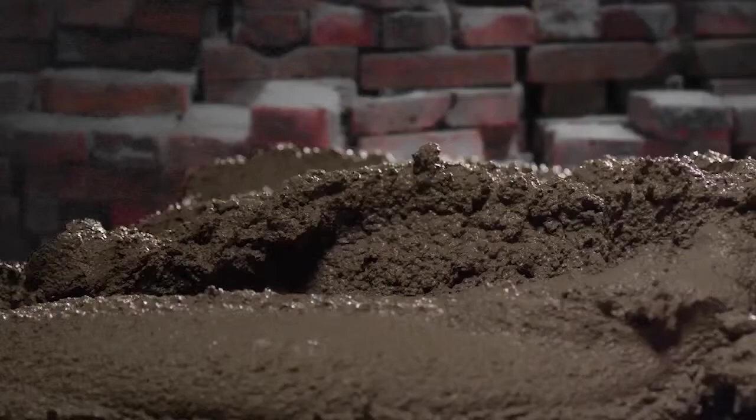Unit 6, Ergonomic Solutions. In previous units, we talked about ergonomics and safety voice. We learned about the risk factors for strains and sprains. Also, we discussed safety responsibility and using good communication skills. Now let's learn about specific masonry ergonomic solutions to reduce these risk factors.

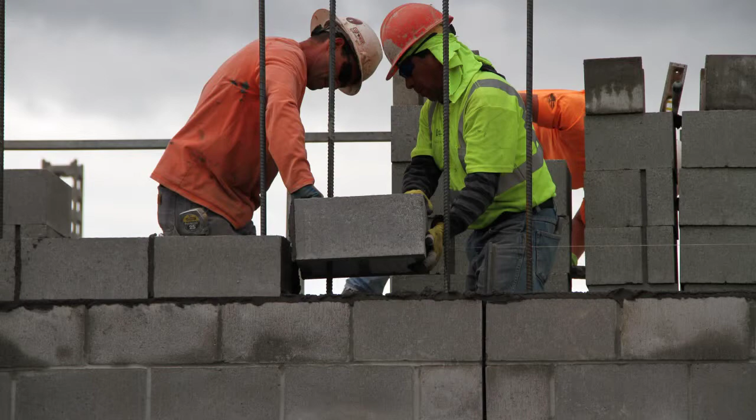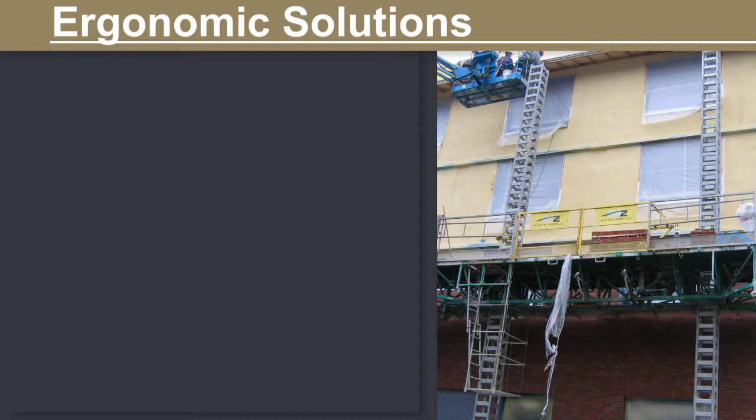Using ergonomic solutions whenever possible reduces your chance of injuries and can help you stay healthy and active for your entire career. Solutions generally fall into three categories: engineering, administrative, and work practice solutions, but they are not all equally effective. There is a hierarchy of solutions. Engineering solutions are the most effective. Administrative solutions are moderately effective, and work practices are important but less effective.

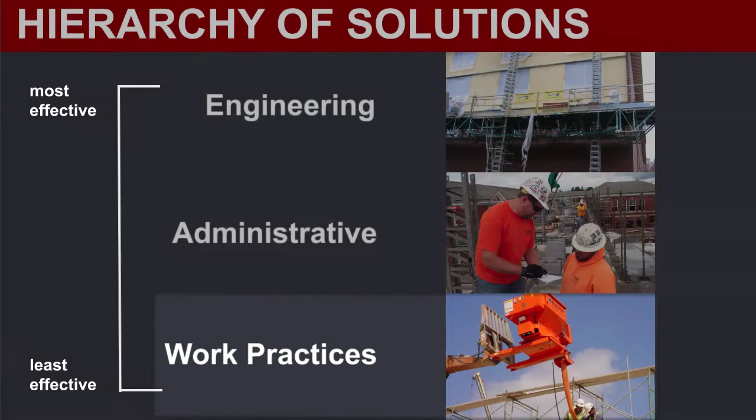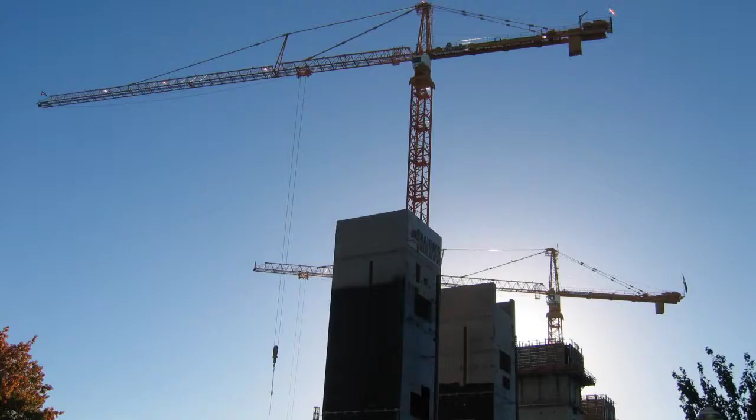What is an engineering solution? This refers to the use of equipment such as lifts, tools such as cordless saws, and work materials such as pre-blended mortar. Engineering solutions are very effective ways of eliminating or minimizing the risk of injury. Some other engineering solutions you may be familiar with are cranes, mortar silos, and using a pumper truck to fill grout.

Look at these pictures. Which do you think is an example of an equipment solution? Record your answer in your workbook. The correct answer is A, mortar mixer, which is material handling equipment. While all of these are examples of engineering solutions, a trowel is a tool, while block is a work material solution.

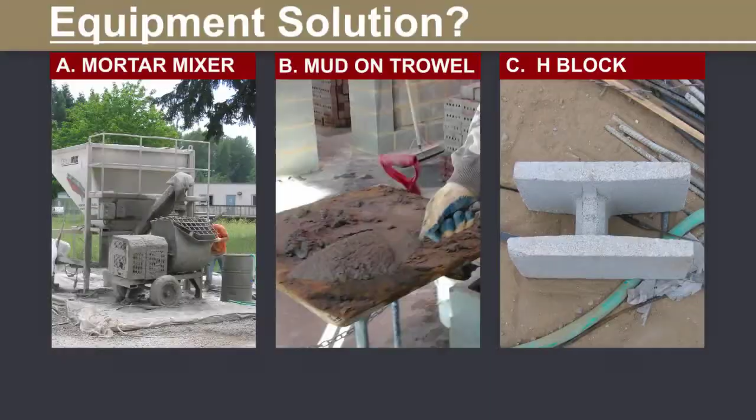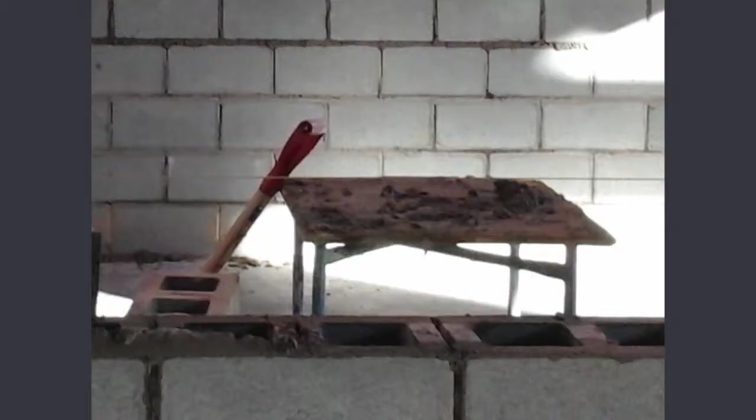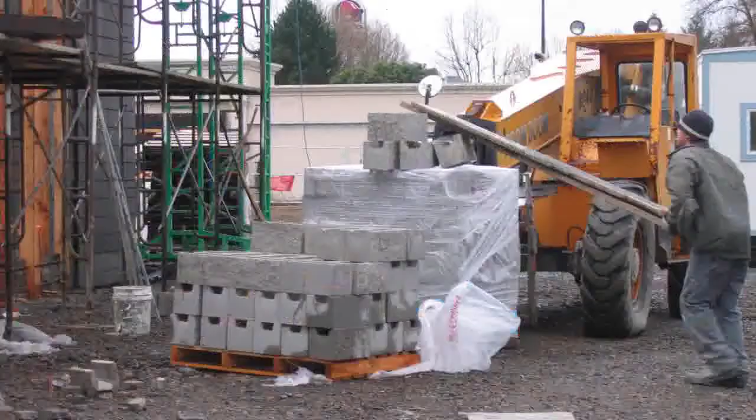Material handling equipment reduces heavy lifting and awkward postures. Some examples of material handling equipment are boom lifts, wheelbarrows, or a pallet jack. What are some examples of material handling equipment you've used or would like to use on a job site?

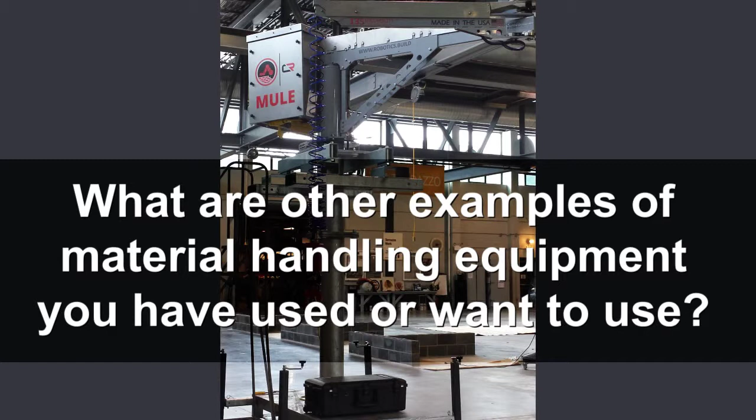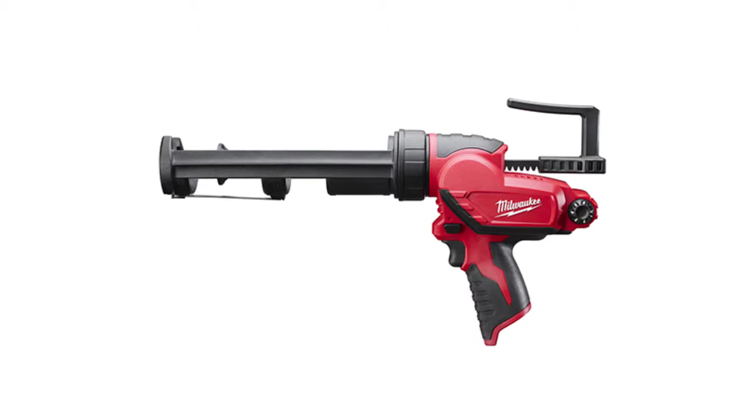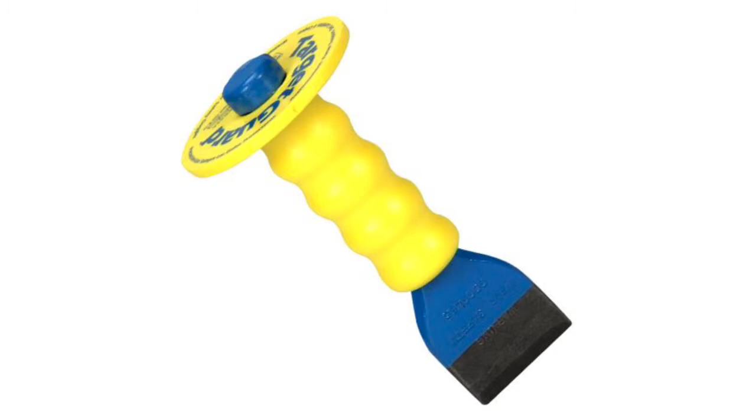Well-designed tools are also engineering solutions. They help reduce forceful hand exertion and awkward wrist postures. Examples include trowels with ergonomic handles and power caulking guns. Other tools decrease vibration, such as hammers with fiberglass handles. Also, consider using chisels that have a plastic guard around the head. This protects your hand in case you miss hitting the head with your hammer. What are some examples of ergonomic tools you've used?

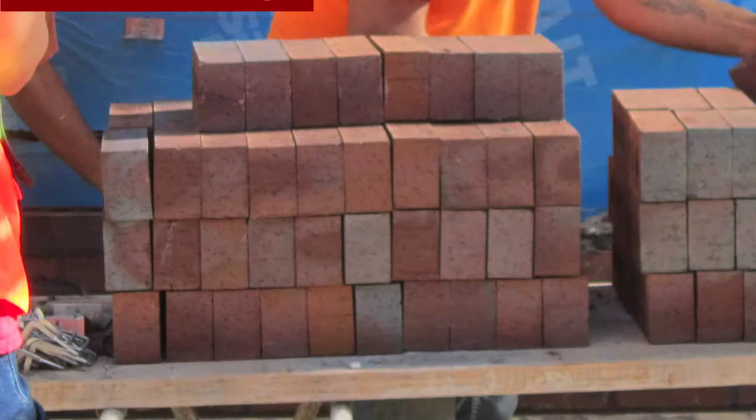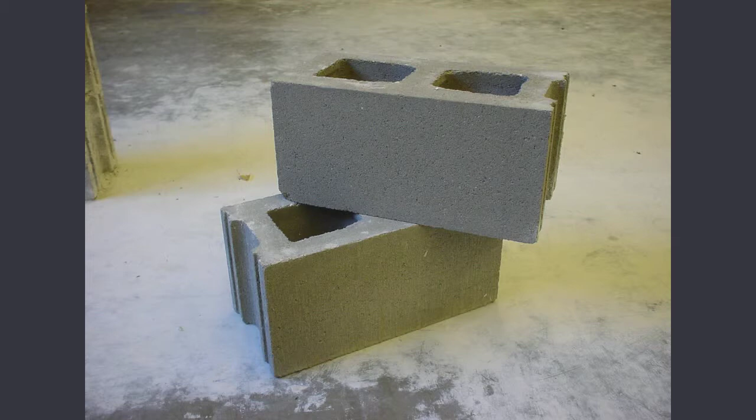Some of the materials you handle are considered engineering solutions. Recall that masons can lift up to 19 tons a week of block and 16 tons a week of brick. Lighter weight materials will reduce your exposure to injury from tasks such as lifting over rebar. Materials such as lightweight aggregate or pumice block can save your body by reducing the weight you lift each week. Pumice block weighs only 19 pounds.

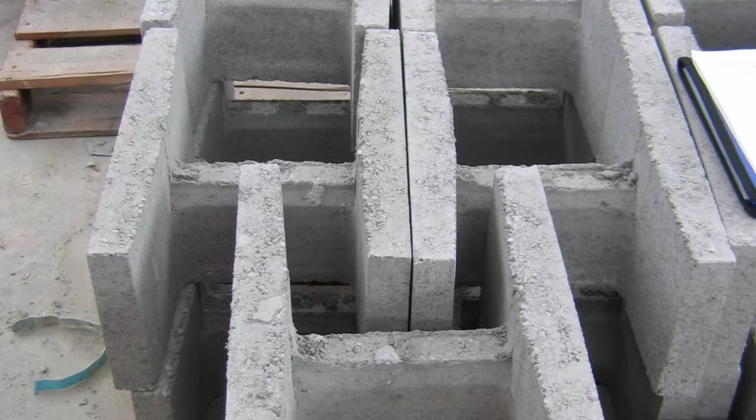A block is block with one end knocked out, while H block has both ends knocked out. Did you know that A block and H block both meet the same ASTM standards as commonly used CMU? This type of block can be set around rebar instead of having to reach over it. Did you know that in California, where seismic requirements call for the use of rebar that is 8 inches on center, almost all block used is H block?

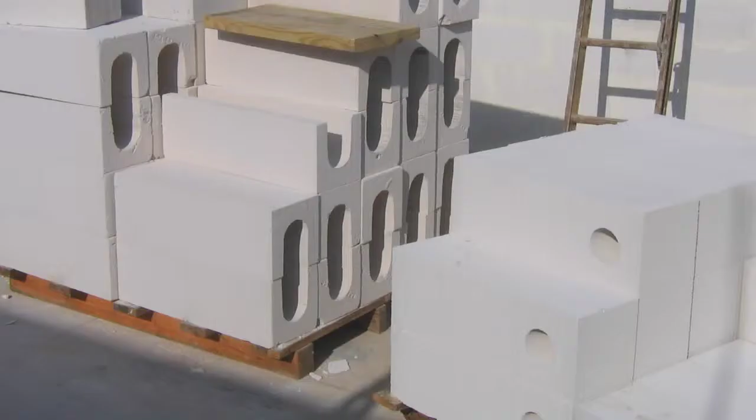New materials such as autoclaved aerated concrete, or AAC, are lighter and larger, meaning fewer blocks to handle. Half-sized pallets are lighter and can be placed on scaffolding, allowing brick to be placed closer to you, reducing manual handling and increasing efficiency.

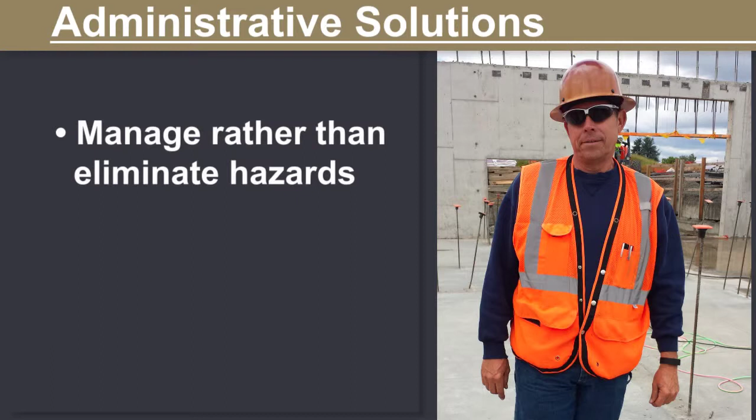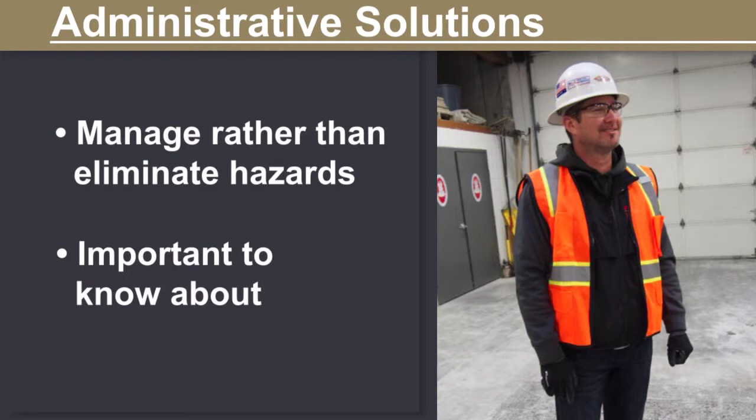Now let's talk about administrative solutions. These have to do with work procedures. They tend to help manage rather than eliminate hazards. You may not have much control over administrative solutions that reduce your risk of injury. Still, it's important to learn about all types of solutions. Over your career, you might be in a position to have direct input on using these solutions.

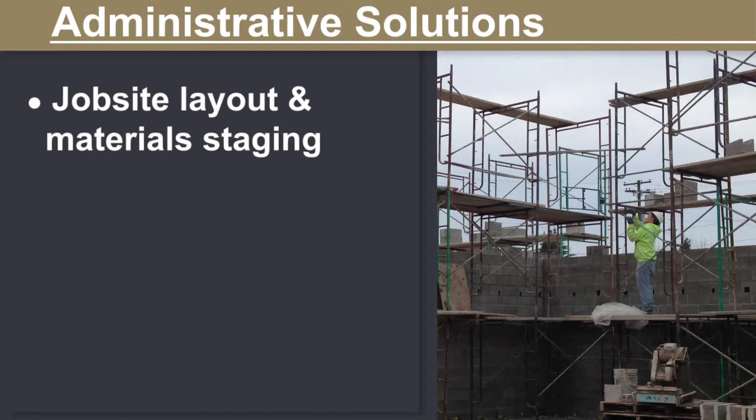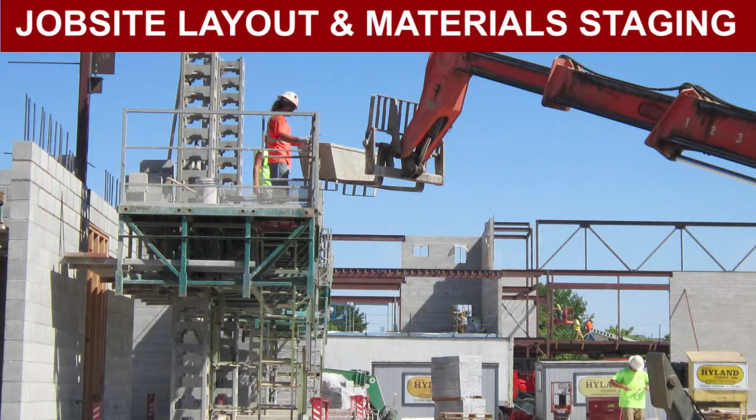Administrative solutions can be broken down into job site layout and materials staging, work sequencing and scheduling, and ergonomics or other occupational safety training. Job site layout and materials staging includes pre-planning materials placement to reduce handling, covering used materials to keep them dry, as well as staging materials close to the end use.

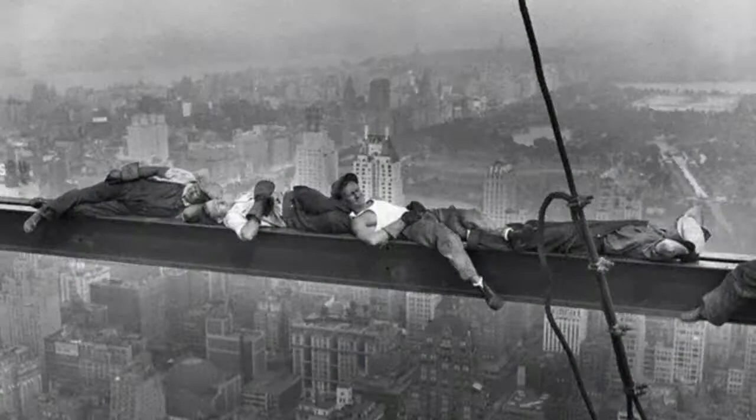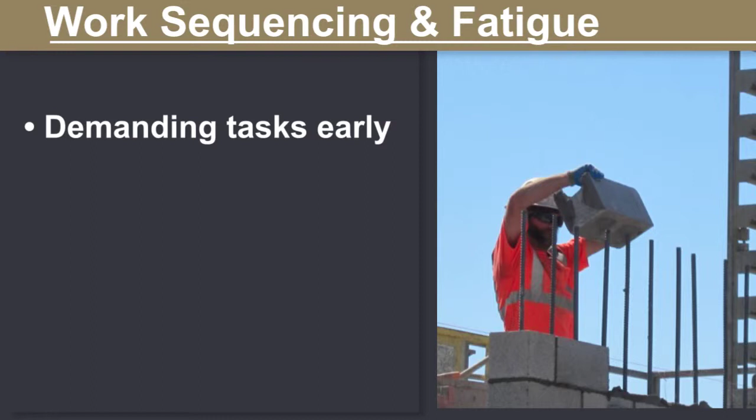Work sequencing and scheduling includes coordinating activities among subcontractors and trades to avoid schedule changes and delays. Most injuries happen toward the end of the workday when your muscles are most tired. When possible, it can help to schedule the more demanding tasks early in the day and take regular rest breaks.

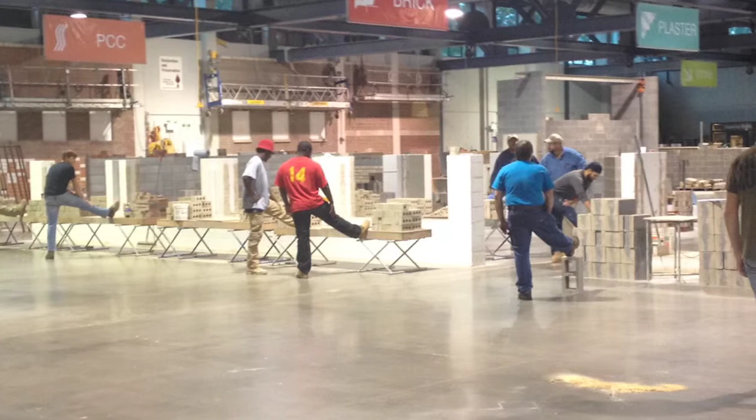Stretching before work is a common practice in construction. However, research has not demonstrated that stretching alone prevents injuries. Regardless, warming up before work is good for you. Be sure to include at least 5 minutes of warming movements like jumping jacks, running in place, or squats as part of your morning routine.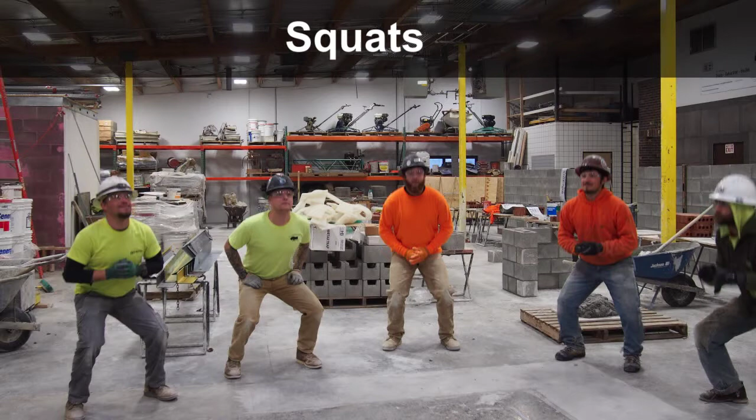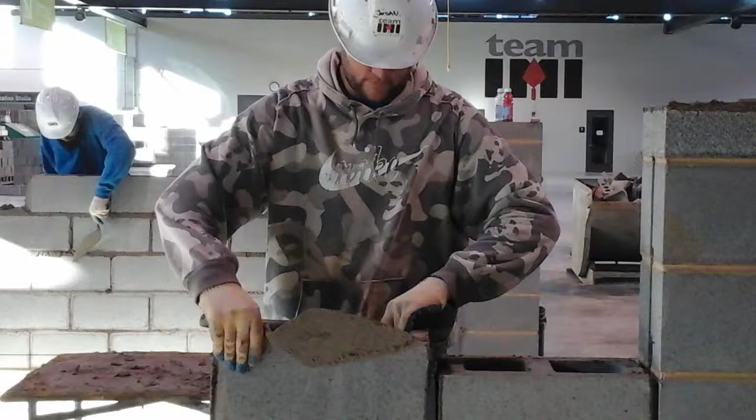Regular safety training is also an administrative solution. Regular labor management meetings provide a way to discuss job hazards and brainstorm solutions. Ergonomics training, such as these units, and well-developed apprenticeship training programs provide an excellent foundation for working safely and productively.

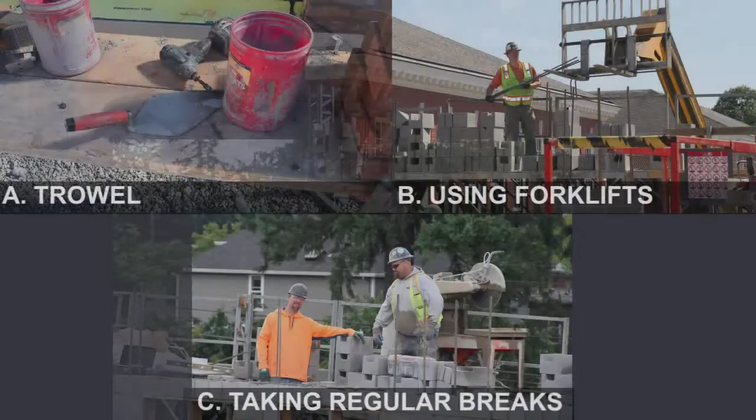Now let's test what you've learned. Which is an administrative solution? Record your answer in your workbook.

The correct answer is C, taking regular breaks. Using a forklift is an example of an equipment solution to move materials. Your trowel is a tool solution. Both the forklift and trowel are examples of engineering solutions.

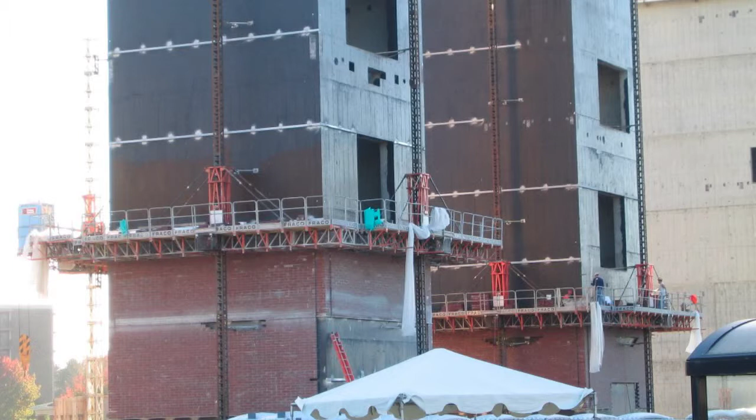Work practice solutions and PPE are the third category of ergonomic solutions. These solutions are important because they tend to be ones within your direct control on a daily basis. What do we mean by work practice solutions? There are ways that you can perform everyday work tasks using ergonomic principles. For example, you are using a work practice solution when you adjust the height of scaffolding to keep your work in the green zone between your knees and shoulders.

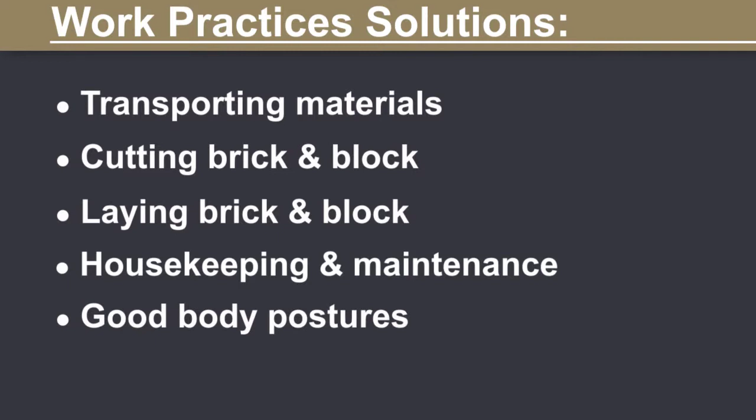There are work practice solutions for several tasks you do each day, such as transporting materials, cutting brick and block, laying brick and block, housekeeping and maintenance, good body postures, and personal protective equipment or PPE.

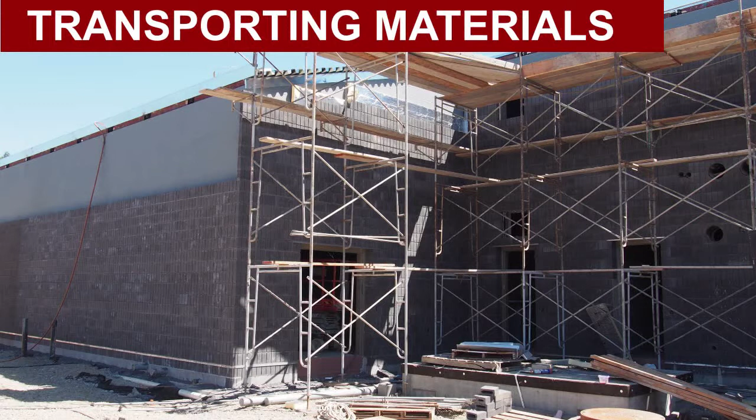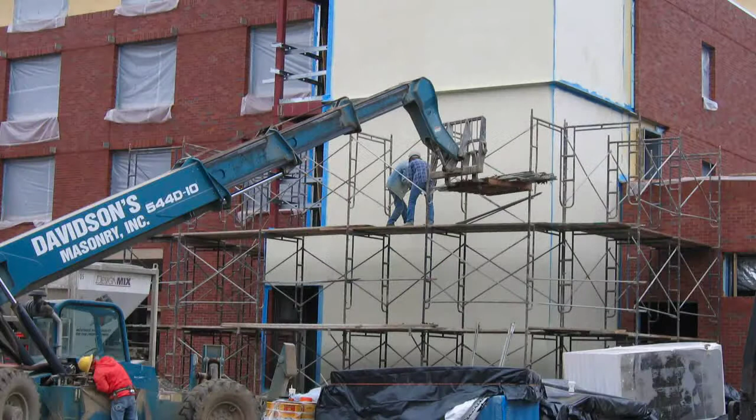One work practice solution is how you transport materials. You can reduce the stress on your muscles and joints by reducing manual handling. Try to only handle materials when you're on scaffolding instead of on the ground. At ground level, material handling equipment should be used instead.

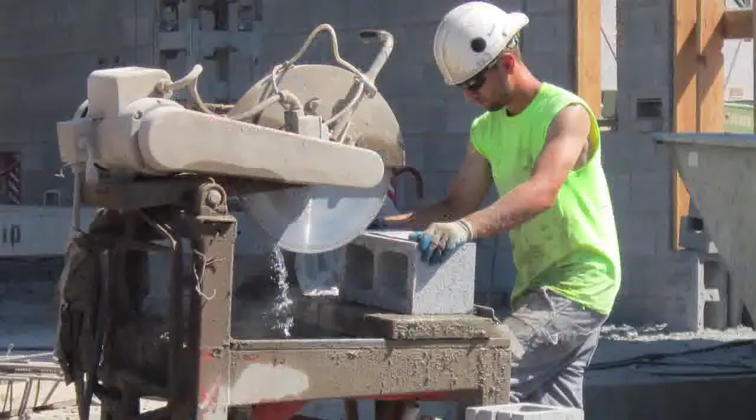You can also use work practice solutions when you cut brick and block. Whenever possible, cut brick or block using a power saw instead of a hammer. You can also saw or cut using a table saw on a solid surface instead of on the ground. Finally, try to select the appropriate diamond or matrix for the job.

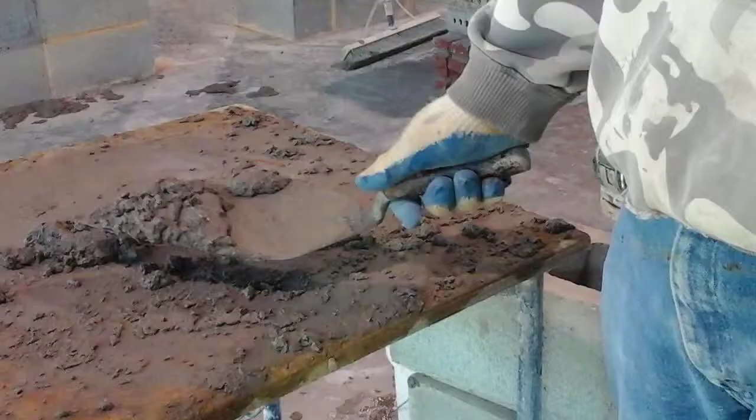Ergonomic work practices can also be used when laying block. Whenever laying 12-inch block, as specified in your contract, use 2-person lift teams. Also, retemper mortar to keep it soft and use as little hand motion as possible when laying mortar. Use a trowel that's comfortable for your hand or one with an ergonomic handle.

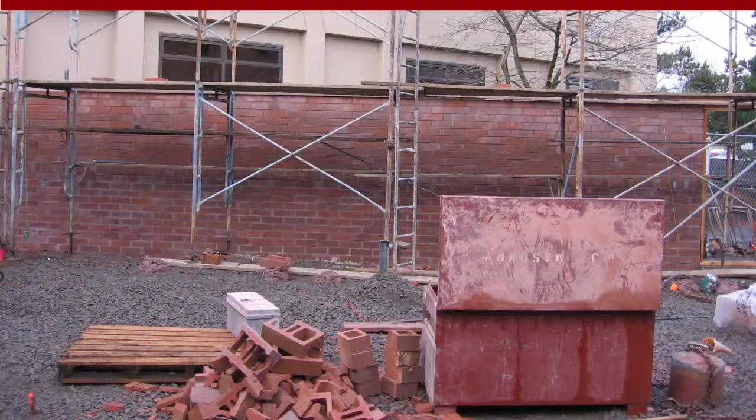While it might not seem like a way to prevent sprains and strains, good housekeeping is important for preventing trips and falls resulting in injuries. Maintaining your tools and equipment is also important for minimizing injury risk. Which is an example of a work practice solution? Record the answer in your workbook.

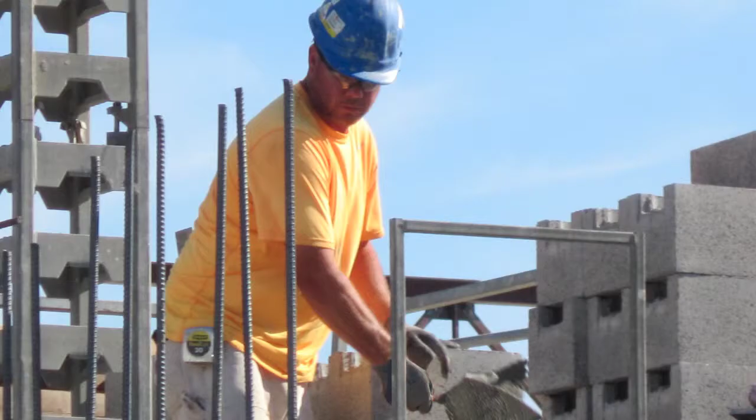The correct answer is A, adjusting the height of the scaffolding. Mortar mixers and lifts are equipment solutions, while ergonomics training is an administrative solution. Another work practice solution is using your body in the safest, most efficient way possible. Neutral postures are safe body postures in the green zone. You should try to shift to neutral, especially when other ergonomic solutions are not practical or available.

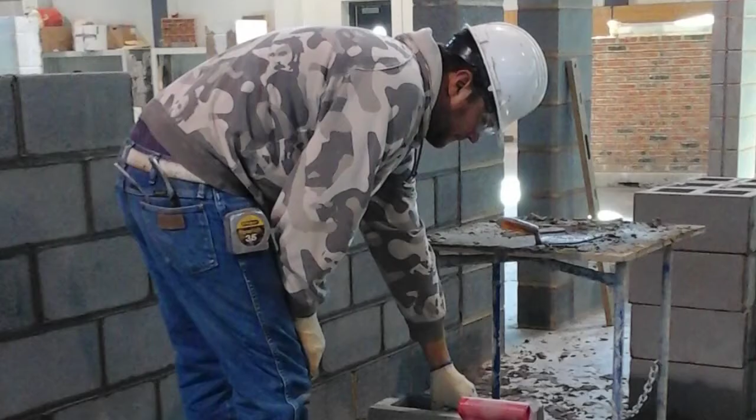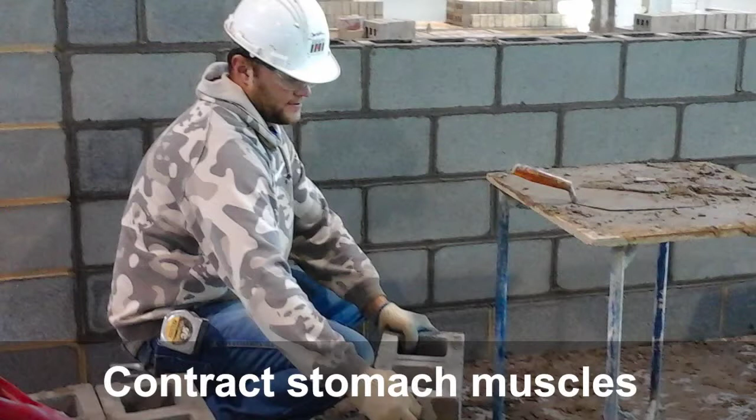Let's review a few tips for good body postures. Unlike these new apprentices, don't let your back round forward when lifting. Instead, just like an arch can support a doorway, arch your low back slightly to support your trunk when lifting. Just before you lift, slightly contract your stomach muscles to provide some additional stability and support to your low back. Key point: arch slightly and contract your stomach muscles before lifting.

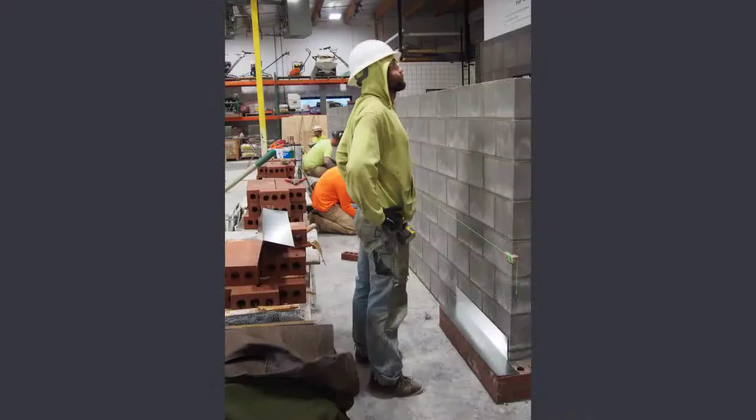Remember that bending forward for long periods of time can cause your discs to bulge backward and press on your nerves. Since you spend a lot of time bending forward, every once in a while you should put your hands on your hips and bend backwards a few times. Key point: several times a day, do some back bends. Let's try this right now. Everyone stand up.

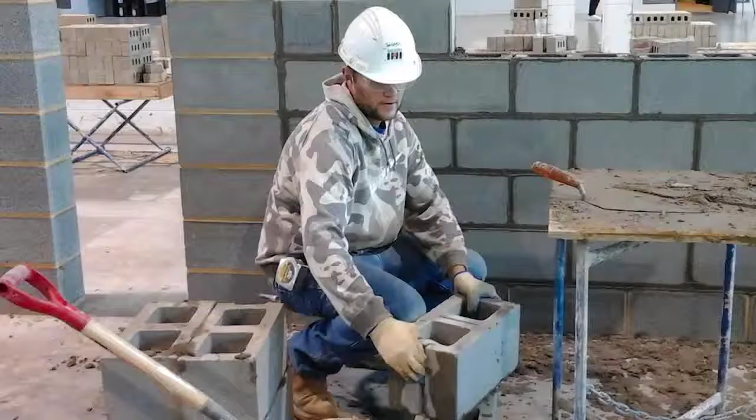Use a wide base of support to provide stability when moving forward or backward, or use a scissored stance to provide stability when moving from side to side. Key point: wide stances provide stability. Remember, keeping loads close to your body when lifting reduces the stress on your low back. Also, always plan your lifts.

Over time and due to our work, we can develop muscle asymmetries. Some muscles become stronger and others weaker, and they don't work together as a team. Research shows asymmetries increase our risk of injury. So use good body postures and ergonomically designed equipment to minimize muscle asymmetries.

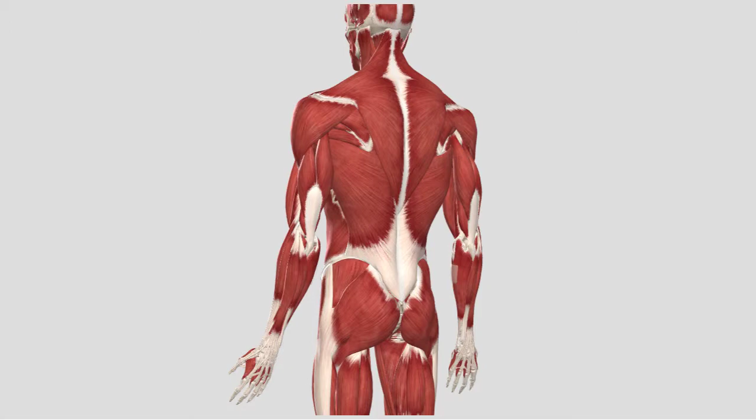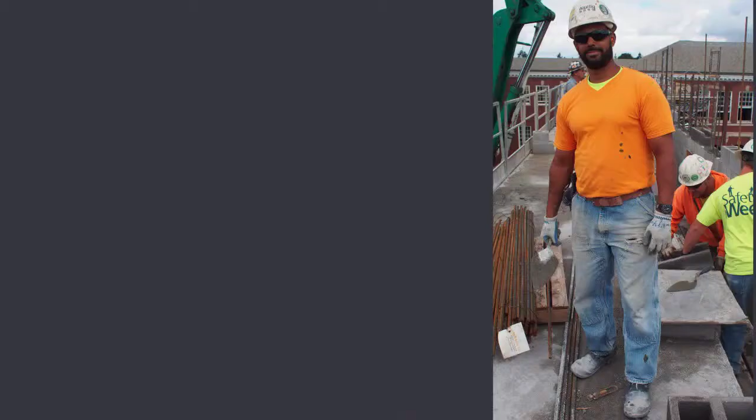Now let's talk about PPE. Personal protective equipment is worn on your body to protect you from all types of injuries, not just strains and sprains, but also protection from dust, scrapes, and burns. PPE you should regularly use include hard hats, safety goggles, earplugs, gloves, knee pads, and steel-toed boots. Can you think of other examples?

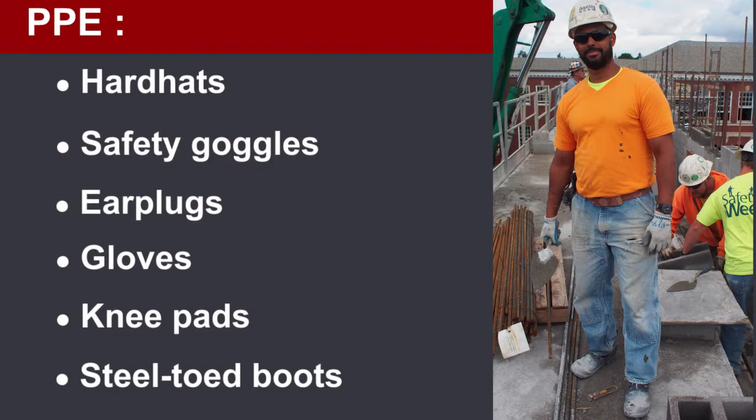Now let's see if you've been paying attention. In an earlier video, the masons were not using the correct PPE. What is wrong here?

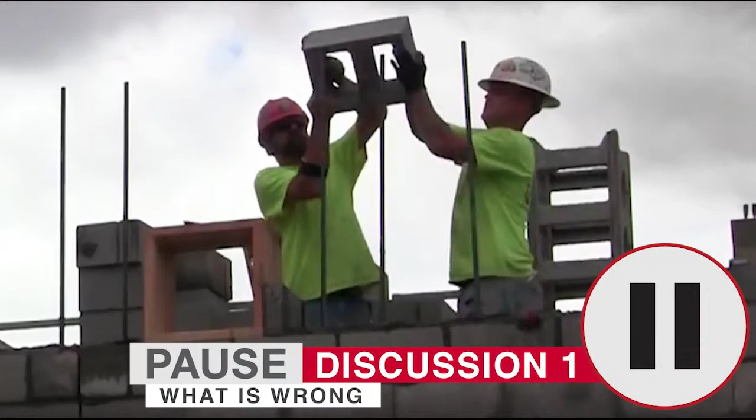To summarize, there are many ergonomic solutions that will help keep you safe and minimize the chances of an injury at work. These include engineering, administrative, and work practice solutions. Engineering solutions are most effective, but administrative and work practice solutions are important and should always be included. As an apprentice, you have the most control over your personal tools and equipment, using good body postures and some work practices, such as raising and lowering scaffolding to keep the work between your knees and shoulders.